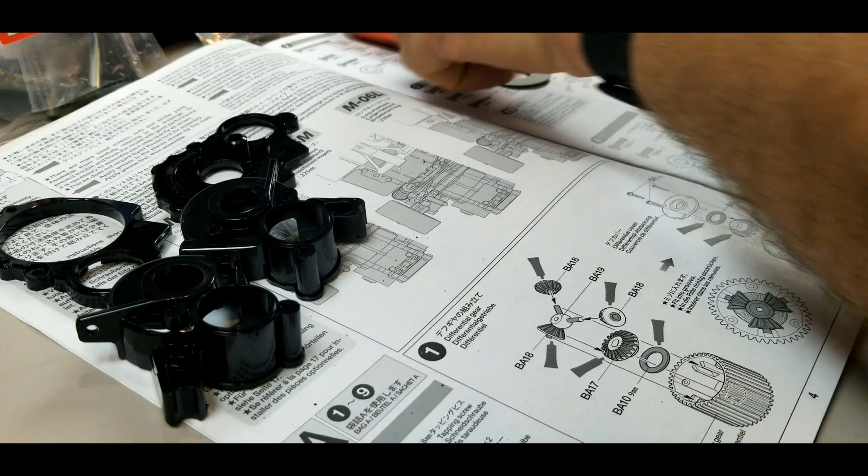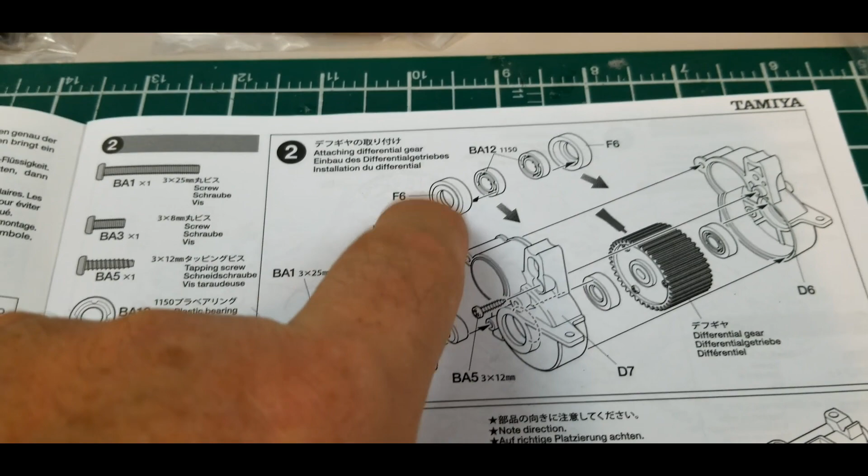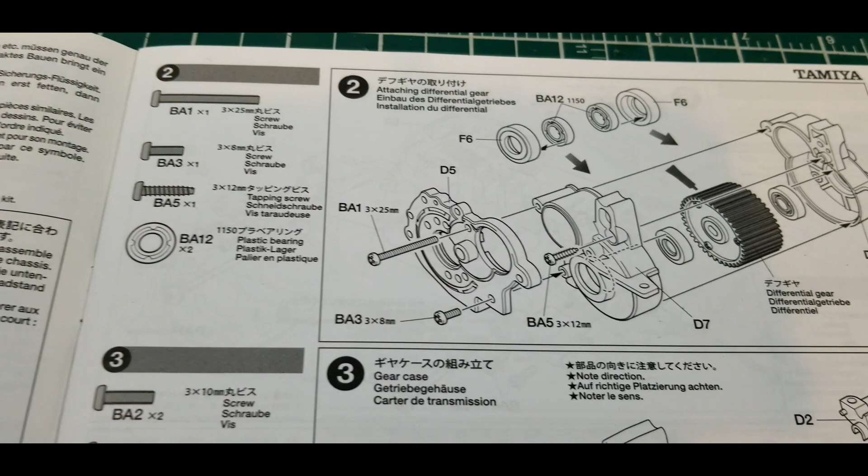Okay, part 2. We're gonna need some parts. I need to find the F tree, F for Frank the Tank, and also some bushings. I do have some bushings, but I'm gonna replace these with bearings. So now is the time to find 2 of the BA12 bearings, 1 BA3, and 1 of these long screws. I'll find this and get back to you.

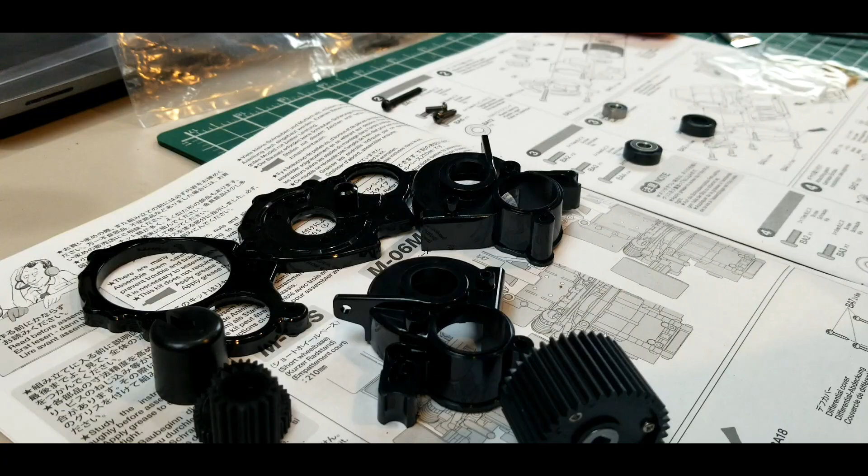Okay, so I got the 2 bearings. I did put one in there already. And here's the F6 part, which is just a piece of plastic. Then you just insert the bearing into the plastic.

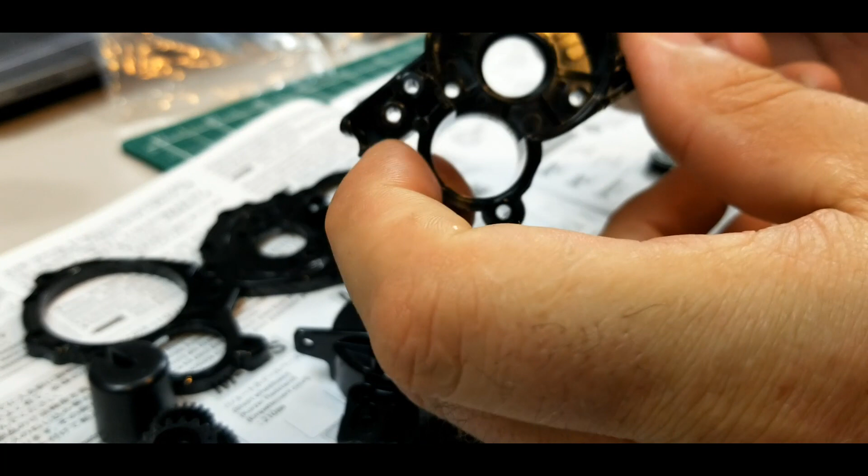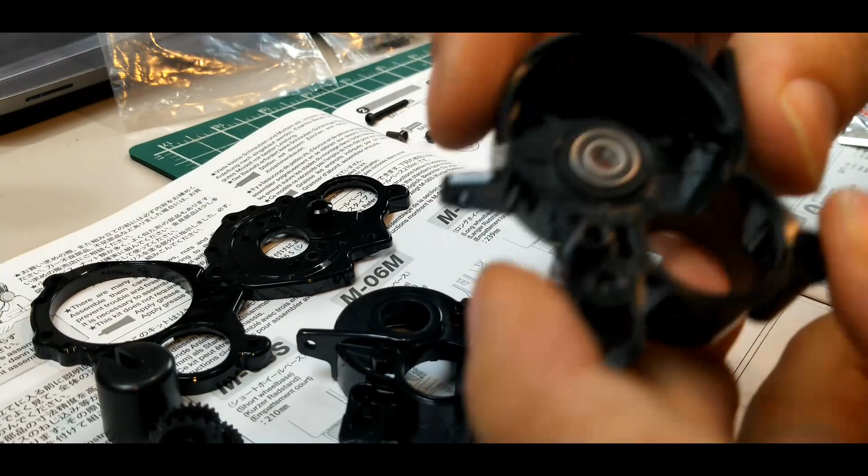And now we can follow the steps one by one and get some parts. These actually fit into a bigger hole over here. Both of them are exactly the same size, so you just squish them in there. And then they should become flush to it, and like you heard, you just go click.

And that's why you do have to have a clean edge around where you trim the things, because it just makes it easier to insert stuff in and out.

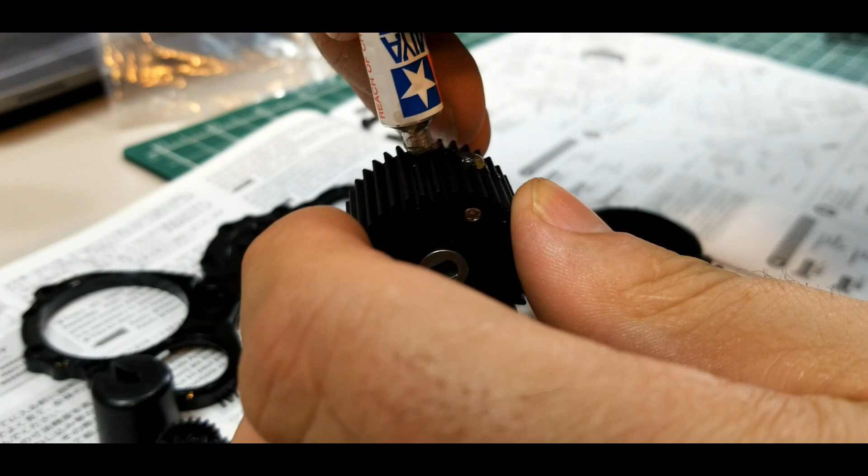So for this, we only need the big one, the bearings, and then we can put the caps together and grease the wheel. Let's put some grease on that wheel all the way around. And you can always put some more grease later on this wheel, because you can actually see it. Grease galore, grease galore.

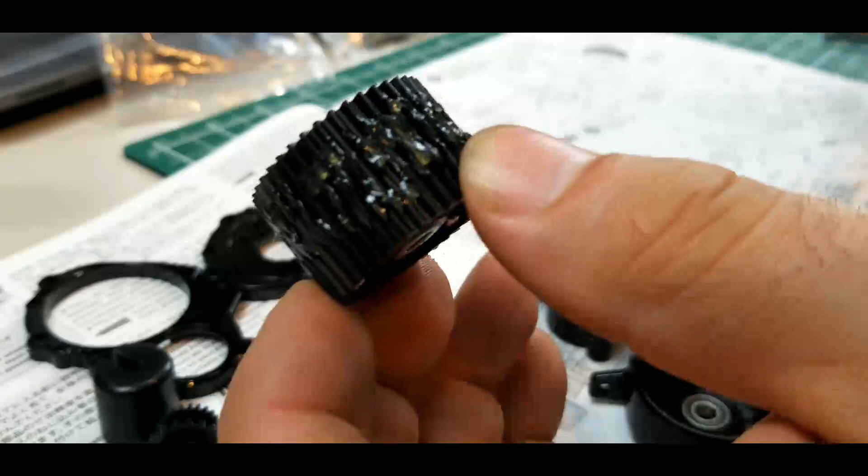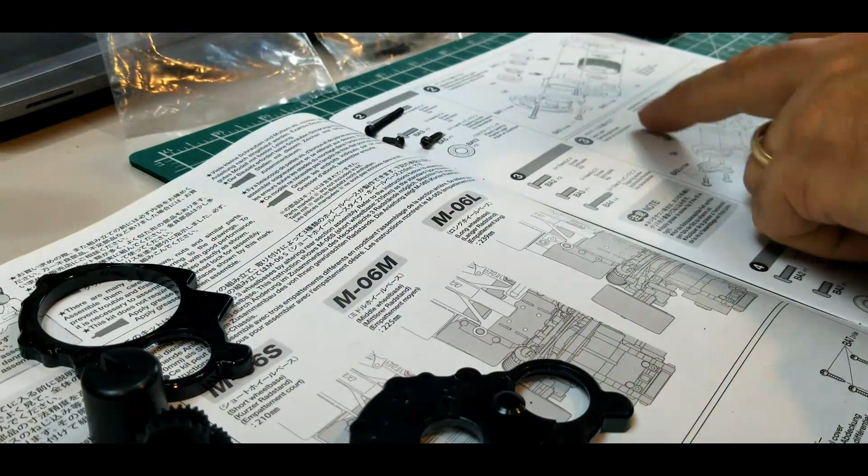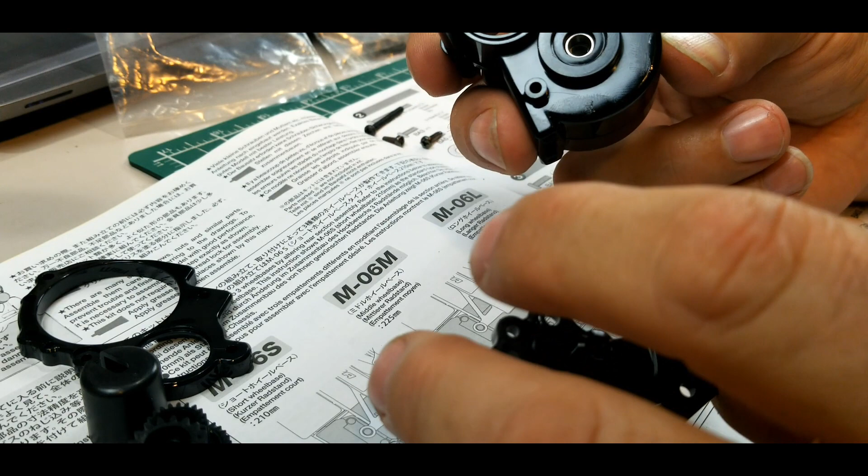Both goes together, and then I get the other cap. It's pretty easy to actually line up the pictures. When you're looking at the pictures, it actually tells you how to hold it when you're putting it all together. In this case, which is kind of odd, okay, so you want me to do it this way. So this is actually the motor mount that is going to go on there.

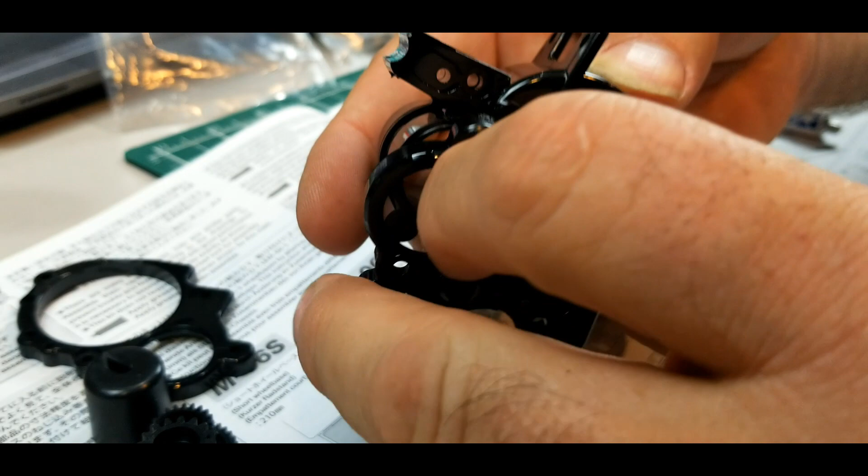Now I need to put some screws. The longest one goes all the way up to the front. Darn, I forgot my screwdriver, my Phillips screwdriver. Hold on.

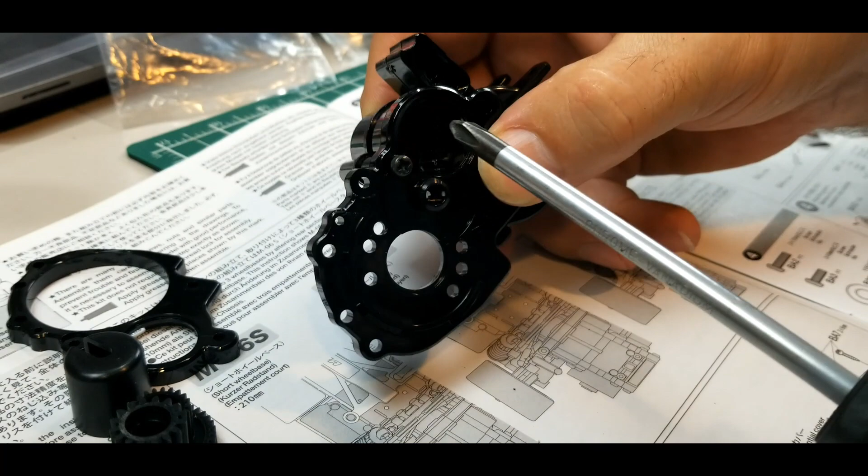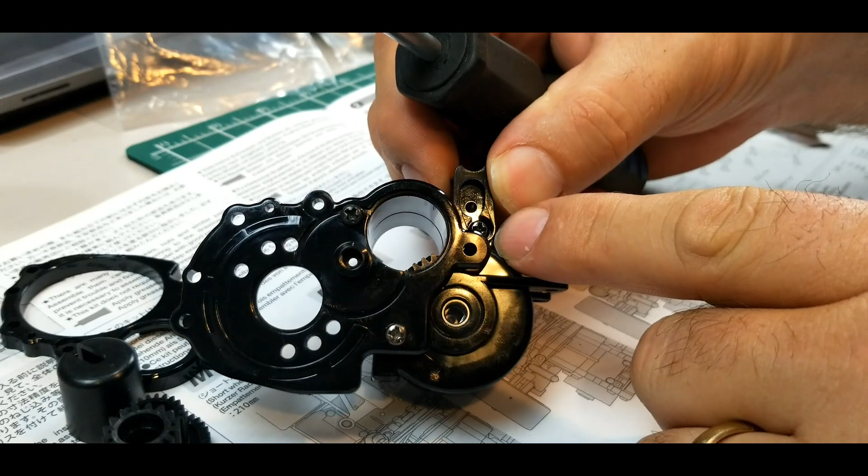Okay, I got my screwdriver, so now I can actually screw everything together, and I won't bore you with it. Here we go, all 3 screws installed. One here, one there, and another one in the hole here. And that's the motor mount, where the motor is going to go, and my differential is in there.

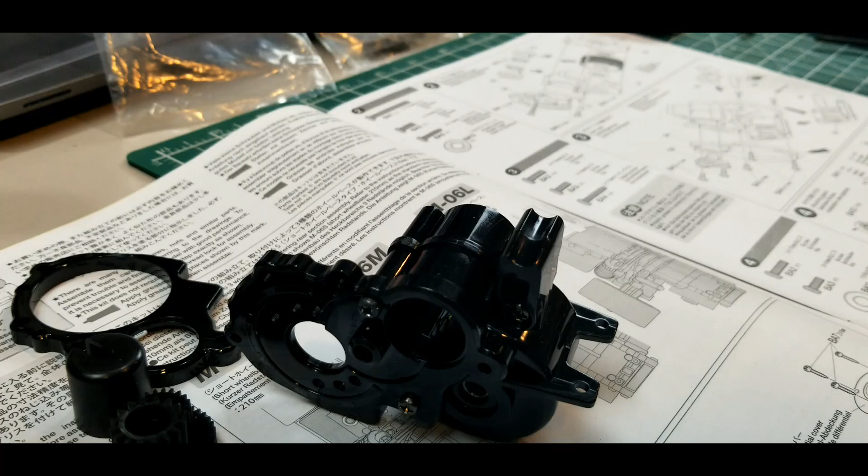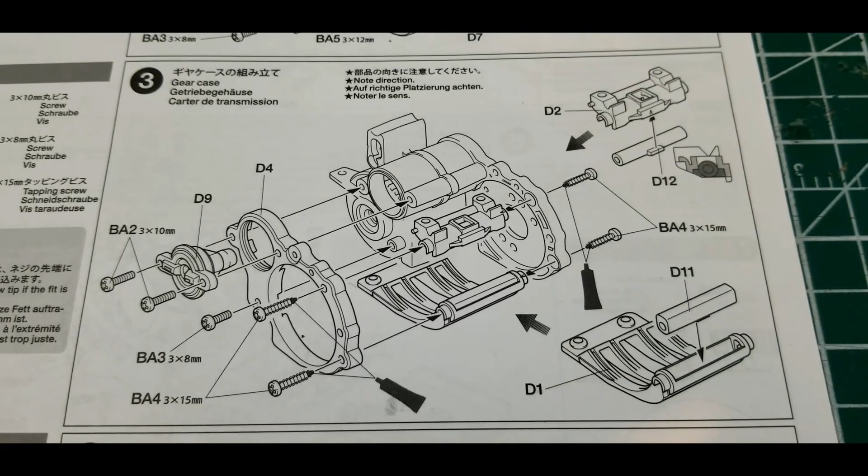So now we're going to move to step 3, and step 3 is the gear case. More of the gear case, so more screwing screws and installing little tiny parts.

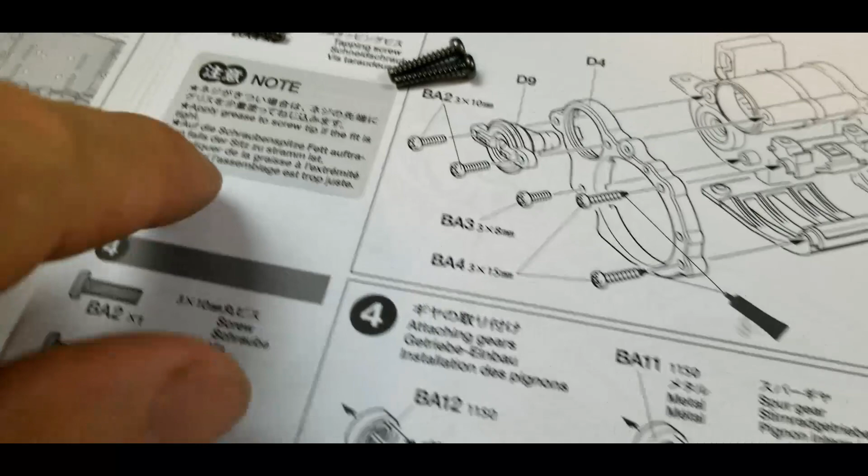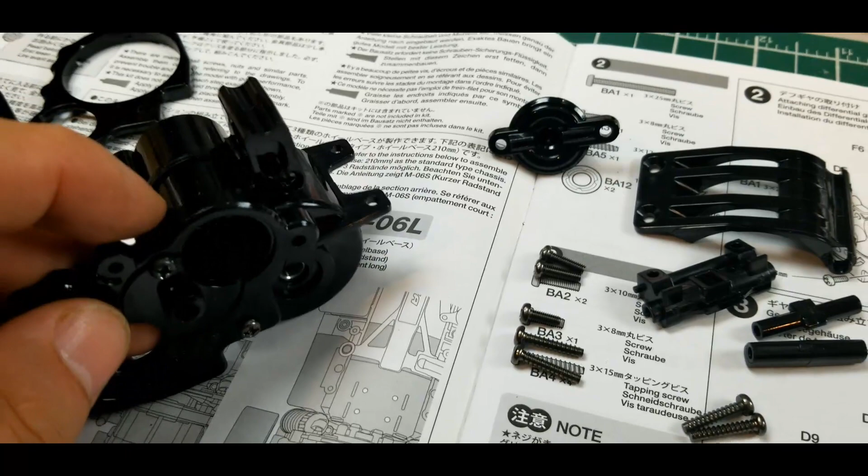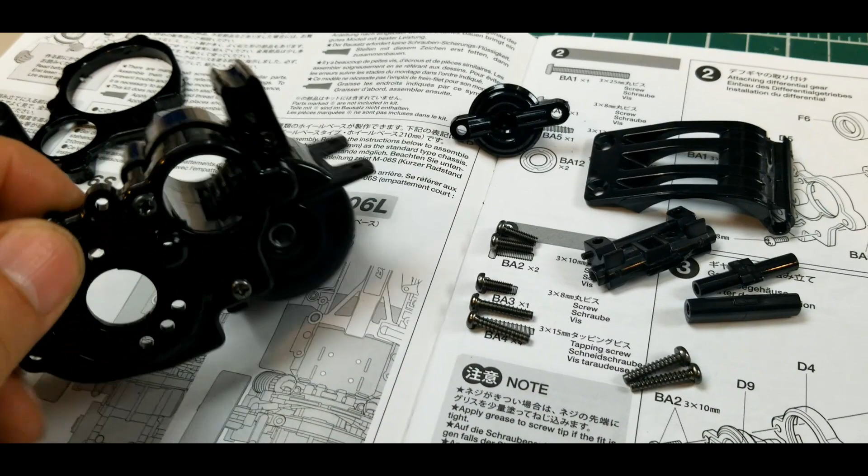So I got all the other parts to put on the diff case. It does mention here that you should apply some grease to the screw if it fits tight. One thing, when you screw these into plastic, keep in mind that they are not pre-threaded, so it is going to be kind of hard to start turning. But when you start turning screws into unthreaded plastic, it does heat up, so once you get close to the end, make sure you stop, because you can strip these very easily.

Once you start screwing them, the plastic becomes hot, it's scalded with the friction. So do be careful, it's more evident with the small thread than the big thread. The big thread is going to stop easy, but the smaller thread, that's the one you can strip very easily, so be very careful.

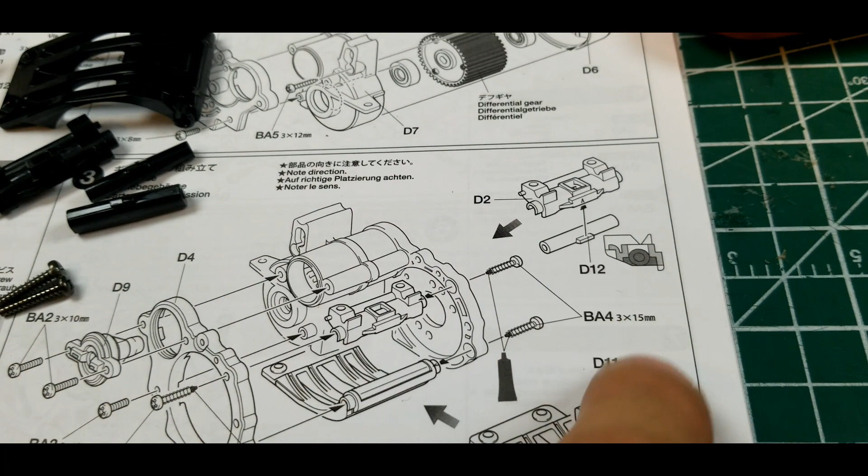So it does show you here how to put the pieces together properly within one another. That's what I'm going to build right now. So let's cue the music.

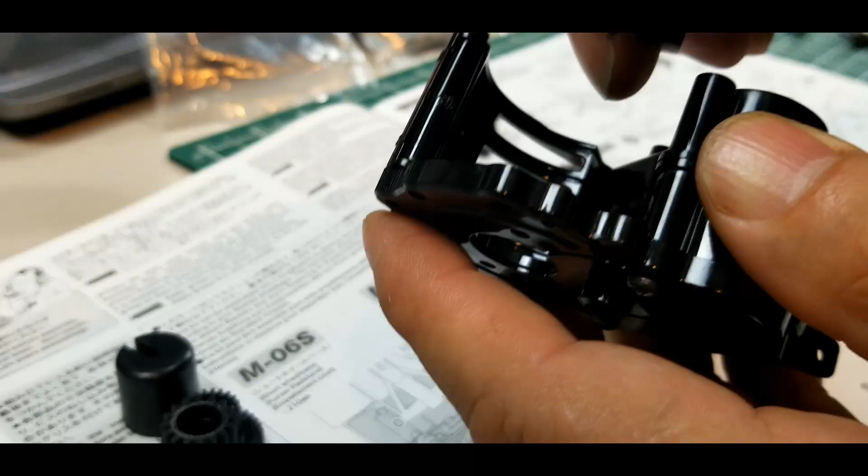So there we go. I did this off camera because it was a little too tough to hold it in front of the camera and tighten up and hold and screw at the same time and make sure I was in frame. So basically there's the differential gear.

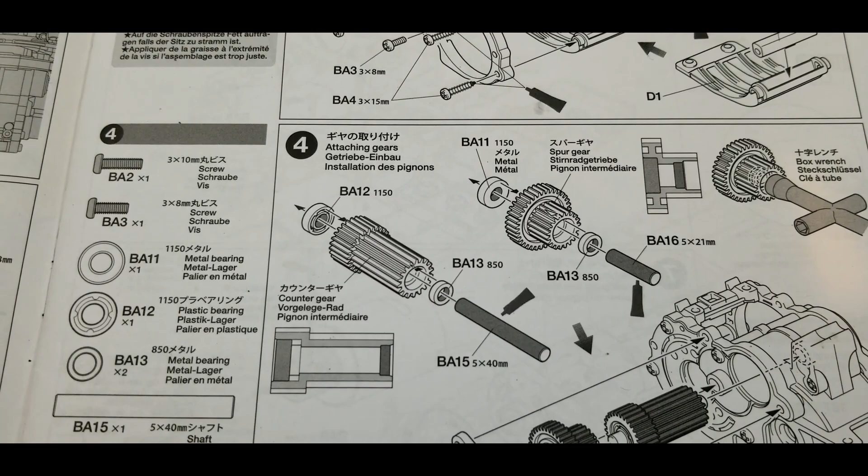So now step 4, I'm going to get all these parts, and we're going to attach the inner gear. It actually tells you to use the box wrench to help you put the bearings in there.